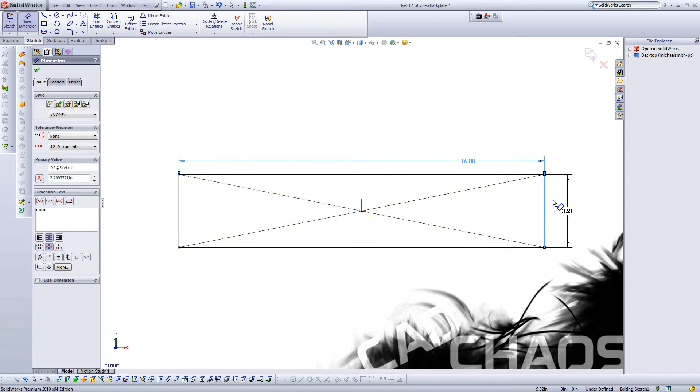Now I start off by creating a square, essentially, that I'm going to extrude, and I make that 16 by 9, which happens to be the same aspect ratio of our videos. It makes it really easy when I get into image editing at the end of the project here. So what I do is I take a 3D sketch there and I align that where I feel the replay button should go. I'm going to use that as an axis for a revolve cut later on in the project.

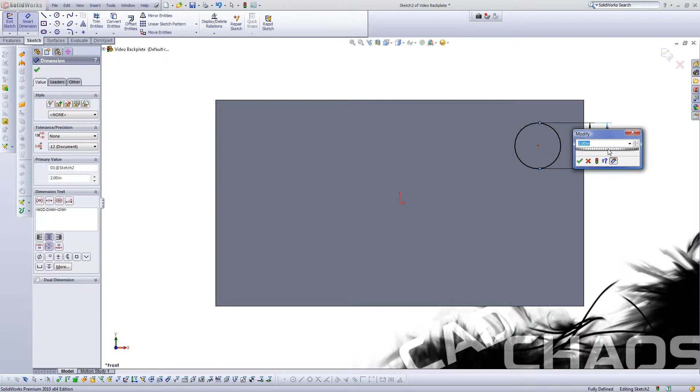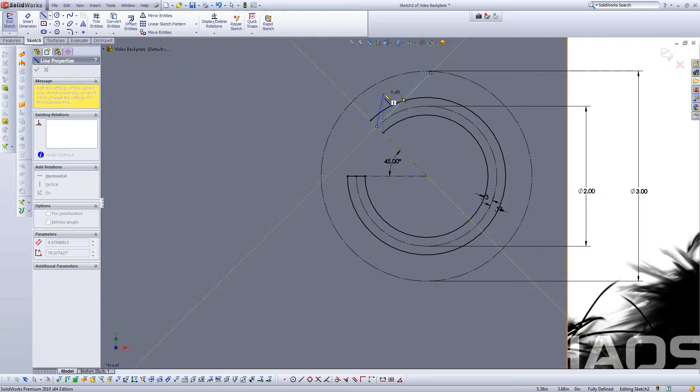Right now I'm just laying out a bunch of circles, and these are just going to be guidelines for an offset when I'm going to create this arrow, which is coming up right now. I find that an offset command is going to work perfectly, and then I just connect the dots, and then I start creating a little arrowhead at the end of here. Although I do have some problems using the arrowhead exactly like this.

That control line there with the 45-degree mate gives me a lot of problems because I can't ever get it to line up and look just right. I solved this right now and I skipped all the mess that occurred when it wasn't lining up right, and I finally get it to look exactly how I was intending, and it looks nice and clean now.

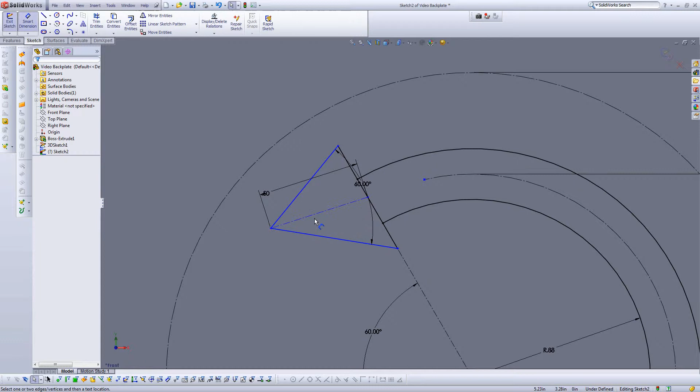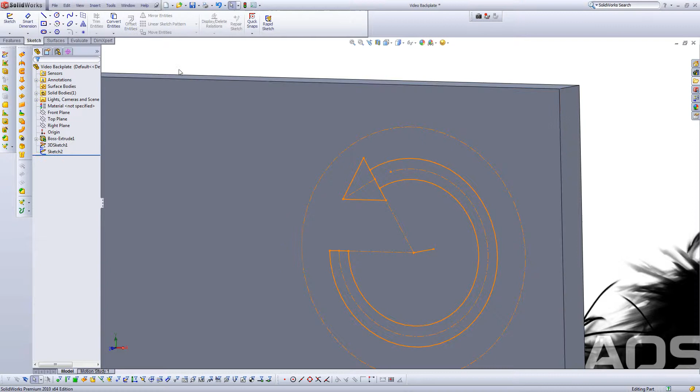Now I do intend to use a surface here, surface extrude from that sketch I just created. However, I noticed that I have 2 loops and I'd only want 1. So I'm going to come back here and I'm going to trim out that arrowhead, which I'm doing right now. And then I'm going to go up to features immediately after this. And I'm going to do a surface offset extrude. I believe that's what I'm using. Yes. Not an offset, just an extrude through all.

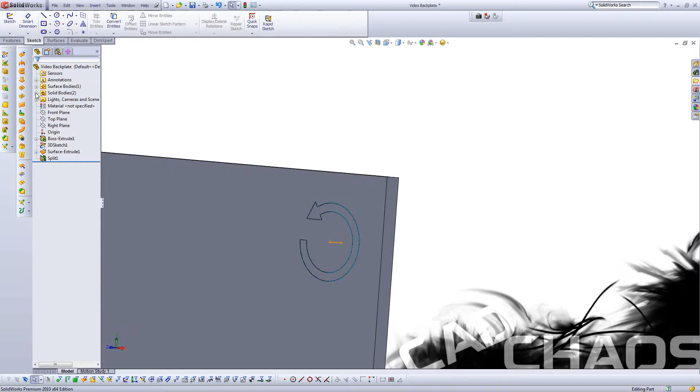And then I'm going to come back and I'm going to use a split command to separate the 2 bodies here, so that I can later edit these individually, separate from each other. So now I'm doing the revolve part here. I leave a little gap because coming up to just a point there at the very tip gave me some sort of geometry problem. So that's why you see that 0.02 dimension there.

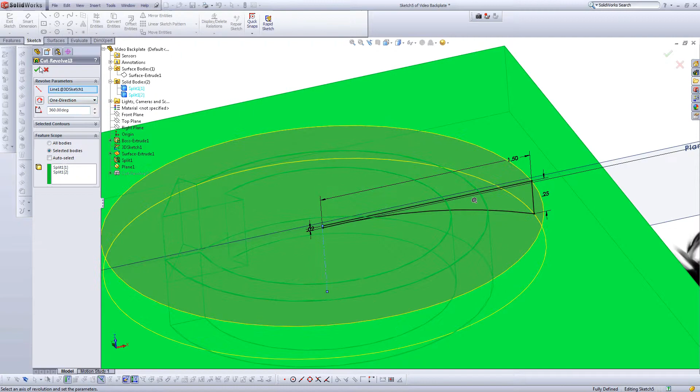So there you go, I get a little revolve cut. Now I do it all the way around through those 2 bodies. And then I'm going to add a fillet to dress things up. And then I'm going to turn around and come to the back, and now this is where I'm doing the surface offset extrude. I just create a sketch on there, convert it, and then I do extrude, offset from surface.

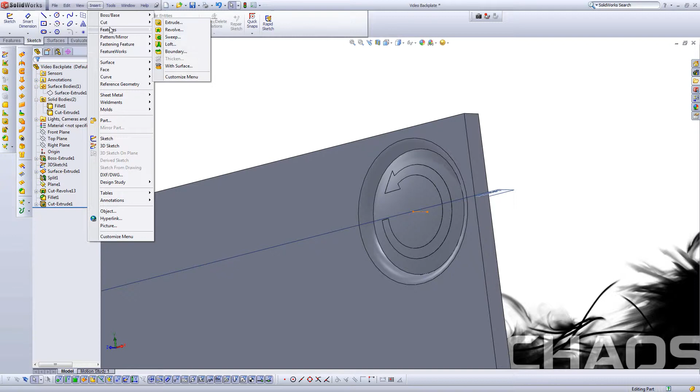And now I'm going to use the move command on the solid body itself to kind of raise that body up from the backplate itself. Now I find that I need to create this body a little bit thicker, so I just edit that offset extrude I just created. Now I'm going to dress this whole thing up with a bit of a chamfer, and yeah, that looks pretty good. That's a good replay button, so I'm happy with that. And that's the end of episode 1.